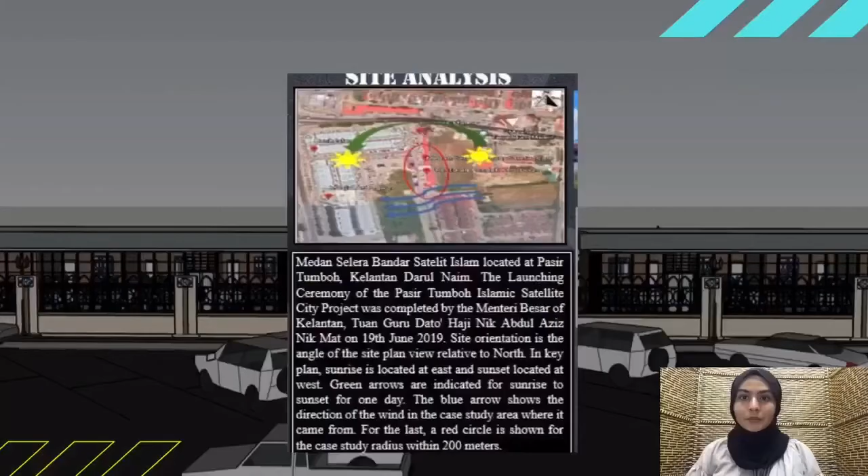Now we move to the site analysis. Medan Selera Bandar Satelit Islam is located at Pasir Tumboh, Kelantan Darul Naim. The launching ceremony of the Pasir Tumboh Islamic Satellite City project was completed by the Menteri Besar of Kelantan, Tuan Guru Haji Nik Aziz, on 19 June 2019.

Site orientation is the angle of the site plan view relative to north. In the key plan, sunrise is located at east and sunset at west. Green arrows indicate the path of sunrise to sunset for one day. The blue arrow shows the direction of the wind in the case study area, where it came from. Lastly, a red circle shows the case study radius within 200 meters.

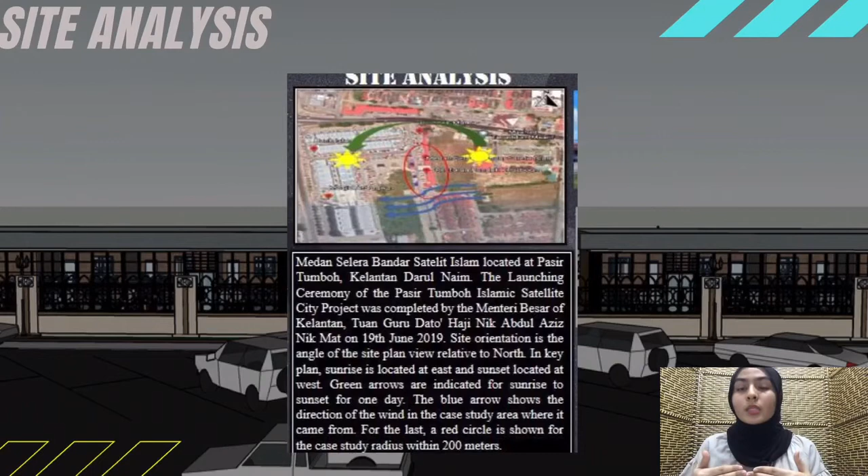We are required to modify the look or facade of the food court to gain more attraction from customers in and out of Kelantan state. The facade is created based on a modern British colonial look, upgrading the function of the building from a food court into a cafe. By that, it will give more aesthetic value and bring such a mood to the customers.

The facade is divided into two wings, and there is a garden between both wings, which slightly functions as a recreation place and the connecting path for customers to enter both wings.

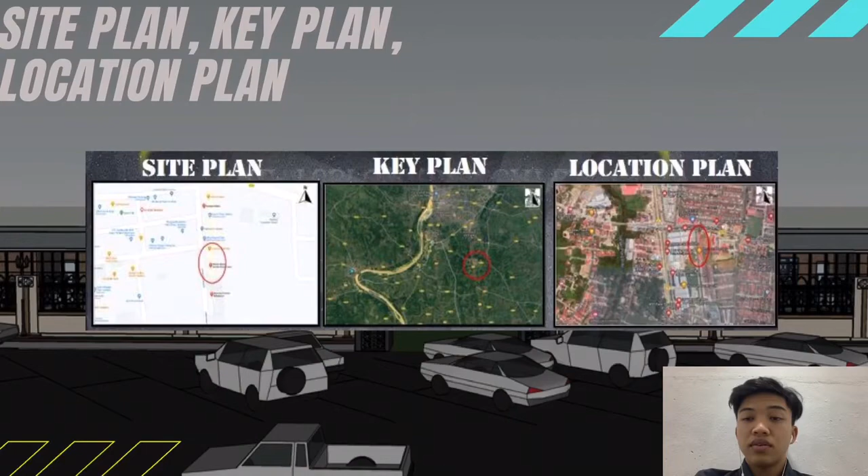We move to the concept idea. Our concept idea provides two places for customers to eat, which are indoor and outdoor. We give options to the customer either to stay and eat inside the restaurant with mechanical ventilation, or to stay outside to leisure and enjoy natural lighting and ventilation.

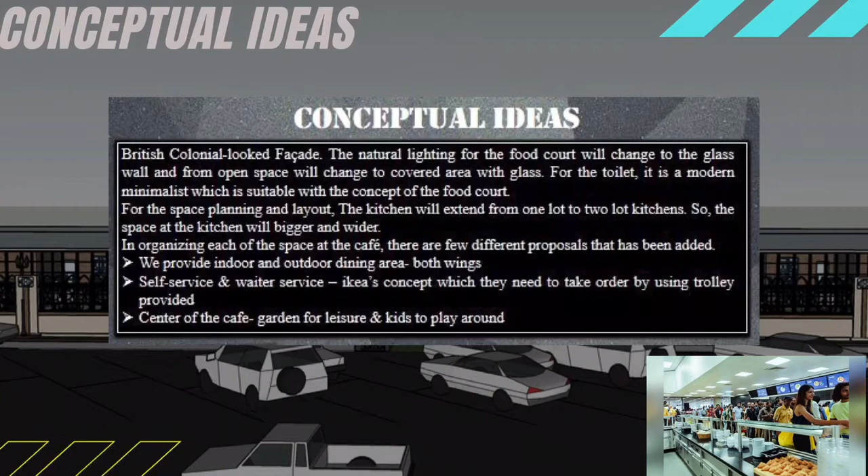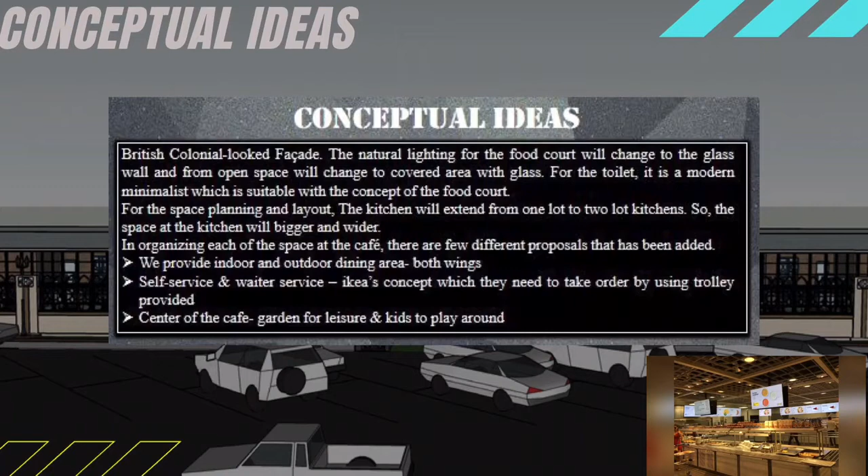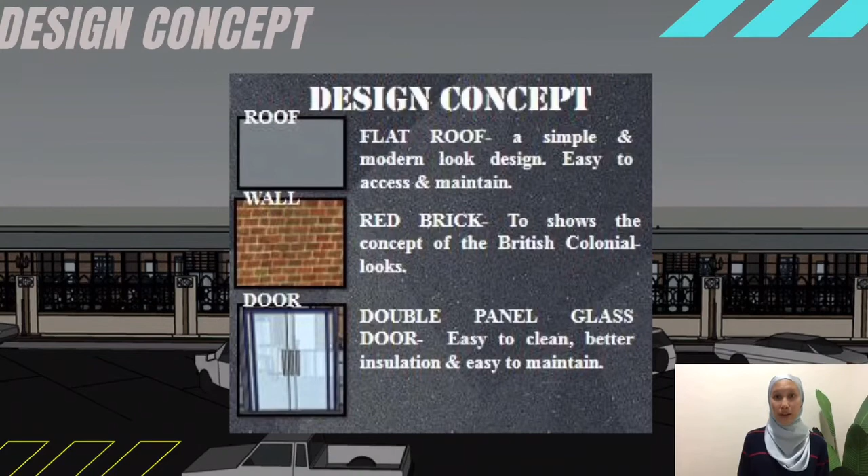Our concept is British colonial and Islamic look, so we use materials such as red brick and glass in front of our case study. We put an atrium aspect with a shaped dome to blend the Islamic look into our case study. Since our case study was known as Bandar Satelit Islam, we needed the Islamic look to remain as the Islamic concept in our facade.

So this is some example that we use as our design concept. In Malaysia, there are several historic buildings that use red bricks, such as Kellie's Castle in Perak and St. Michael Church, located in Sandakan.

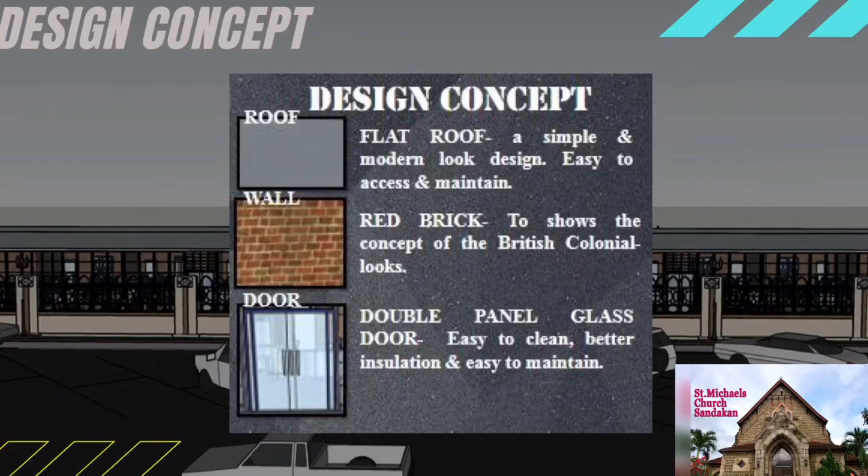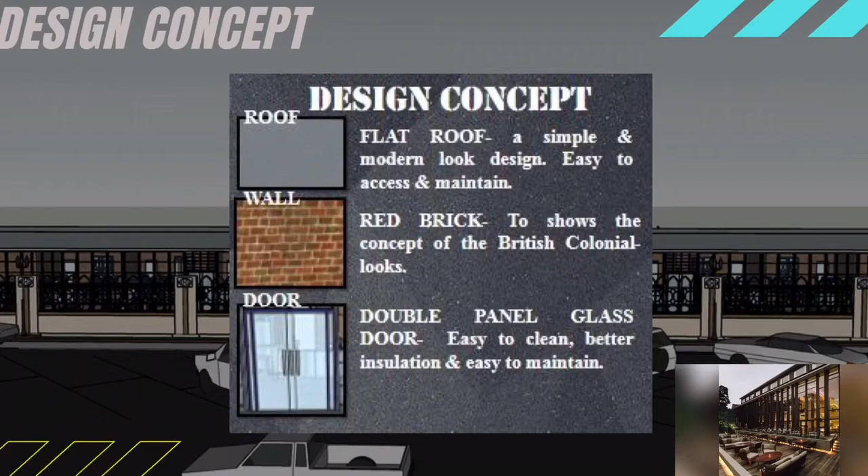So this is an example of the glass wall that we use for the idea in our new facade. We move to architecture design and building elements.

For architecture design, there is a single large hall with a common sitting place for both wings, and the concept design for the facade is British colonial looks, blended with Islamic concept, which has been applied to create a garden using a dome, and there are 3 stalls for each wing respectively.

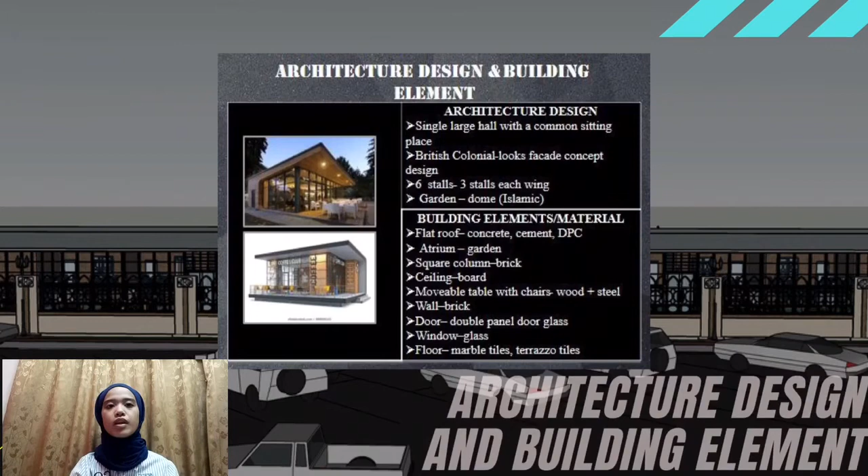For building elements, we are using a flat roof, made up of concrete, cement and DPC. For the garden, we used an atrium glass dome.

Column and wall, we used red brick. For the ceiling, we used board, and there are movable tables with chairs, made up from wood and steel.

Types of door: we use a double panel glass door, while for window we use a fixed glass window. Lastly, for the floor, it is finished with marble tiles and terrazzo tiles.

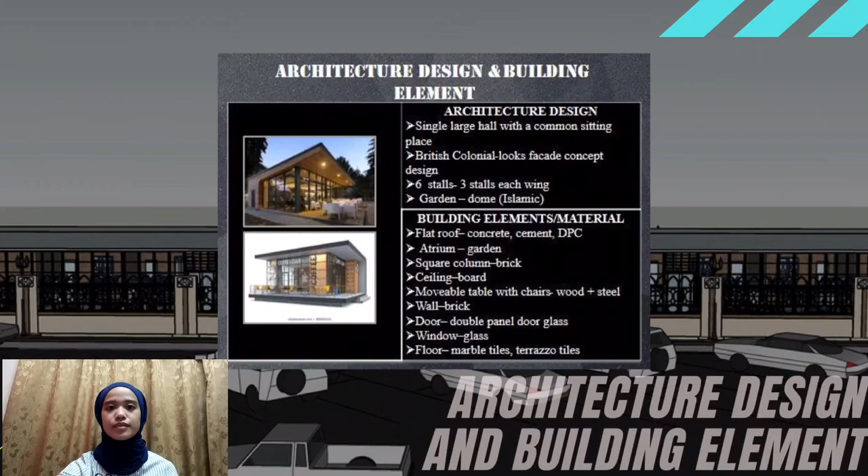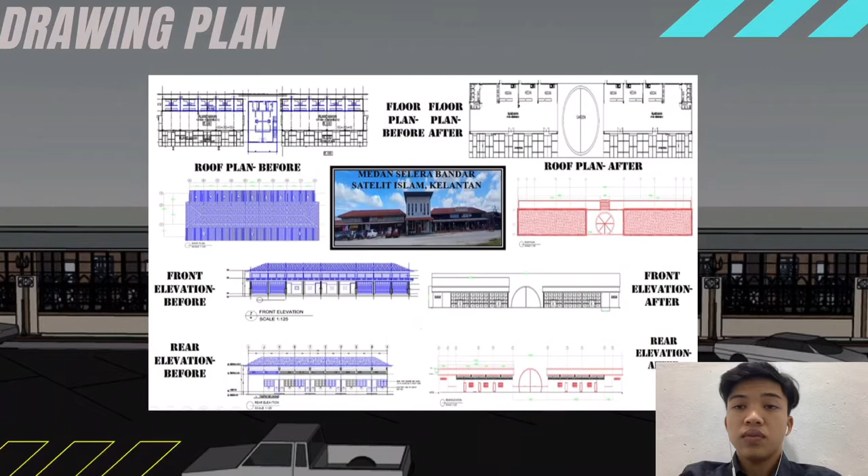Last but not least, we also added more toilets at the left and right of the food court, and we also made a toilet for the OKU. Okay, that's all for the floor plan.

Thank you. Okay, now we move to the drawing for the roof. We have 2 types of roof: flat roof and atrium aspect with dome shape.

For the flat roof, we will provide a DPM, damp-proof membrane, to prevent serious defects occurring, such as mold growth, temperature issues, and dampness.

Besides that, our flat roof will provide a drain and scupper drain to flow the water from the drain to the gutter. The material we use for the flat roof is concrete.

So the next one is the atrium aspect with a dome shape. As I mentioned before about the Islamic concept, we use the dome to blend the Islamic concept into our new facade.

We put the atrium aspect in our garden to give a large open air feel, and besides that, it gives natural ventilation and natural lighting to the plants in the garden, blending natural lighting with the element of green building.

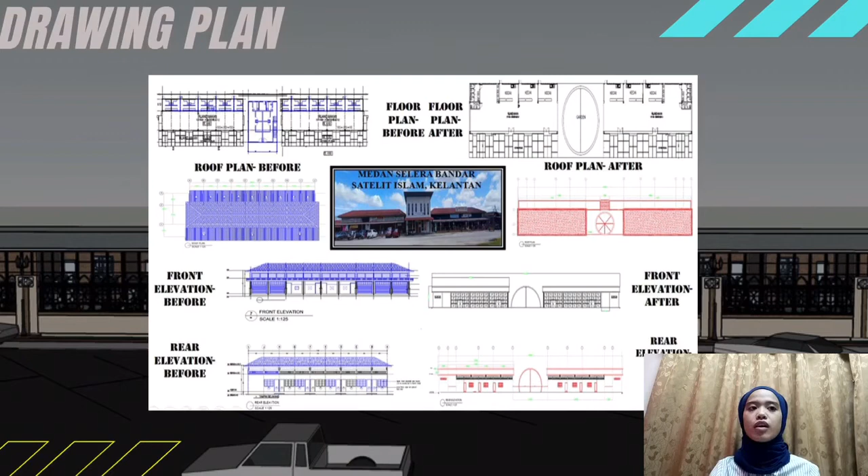There are some changes to the front elevation of the building facade, before and after. Before refurbishment, the existing buildings used a pitch roof, and after refurbishment, it is changed into a flat roof. The function of the office before refurbishment is unknown.

After the refurbishment works, it is changed into a garden with a purpose of recreational place, and the number of stalls is divided into 3 stalls respectively for both wings.

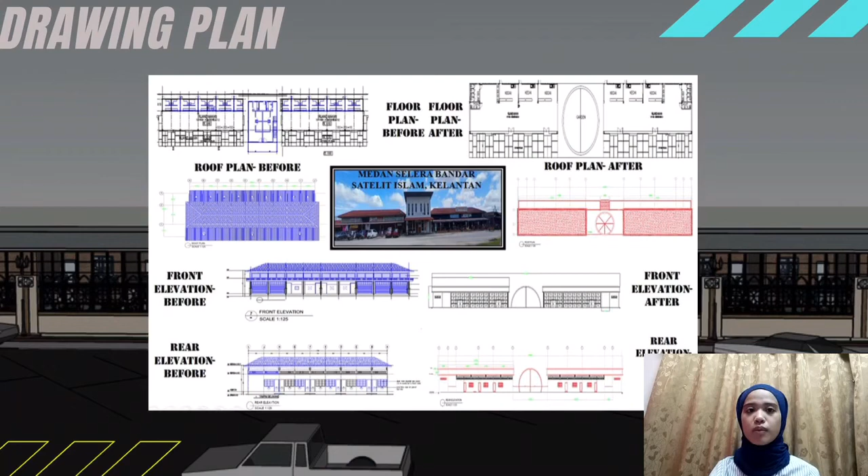As you can see from behind, which is the rear elevation, this building has 3 areas: left, middle and right. These areas have different functions.

For left and right, they function as kitchen and dining area. But for the middle area, it is the garden.

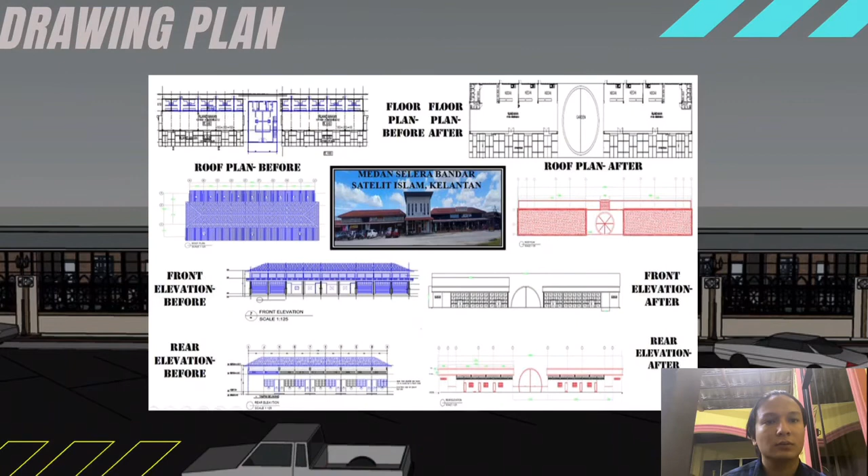We also refurbish and add a new part, which is a toilet for men and women. Next, we also refurbish and add a toilet special for disabled people.

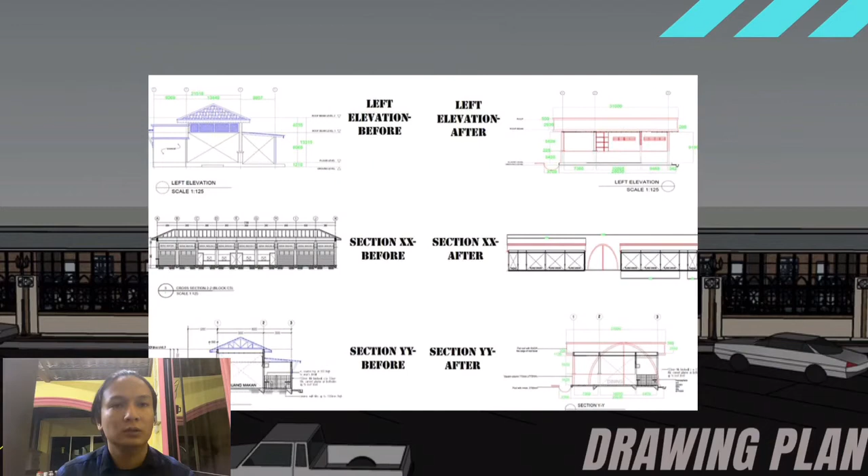Section XX of Al-Tusi Garden Cafe is just the same as the front elevation, with some changes in roof types, number of stalls and location of the stalls, and the function of the office building, which is converted into a garden for recreational purposes.

Section YY, there are a few things that have been changed: the roof type of the existing food court has been changed into a flat roof for the new cafe project, and the entire office building has been converted into a garden for recreational purposes.

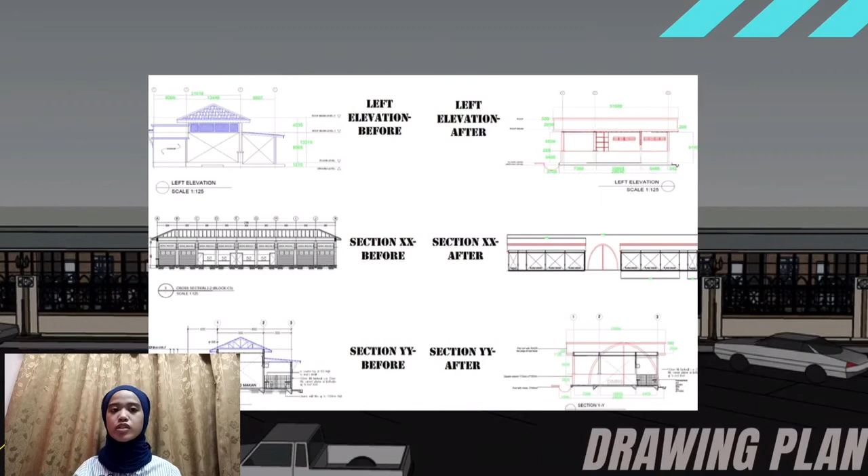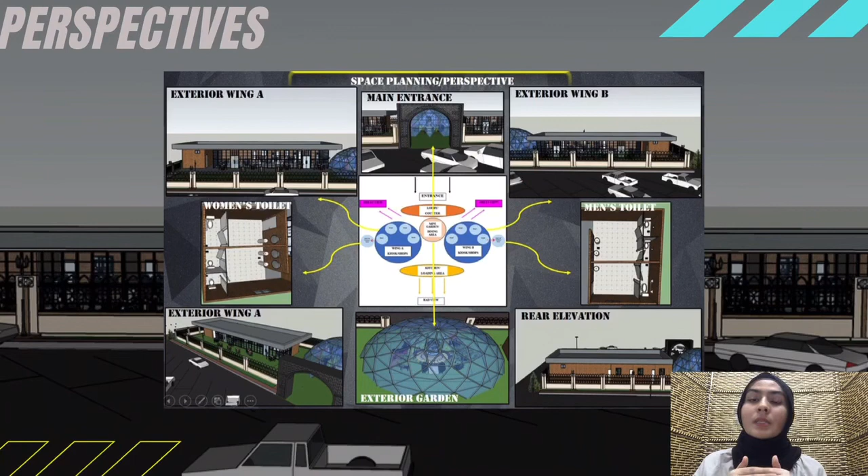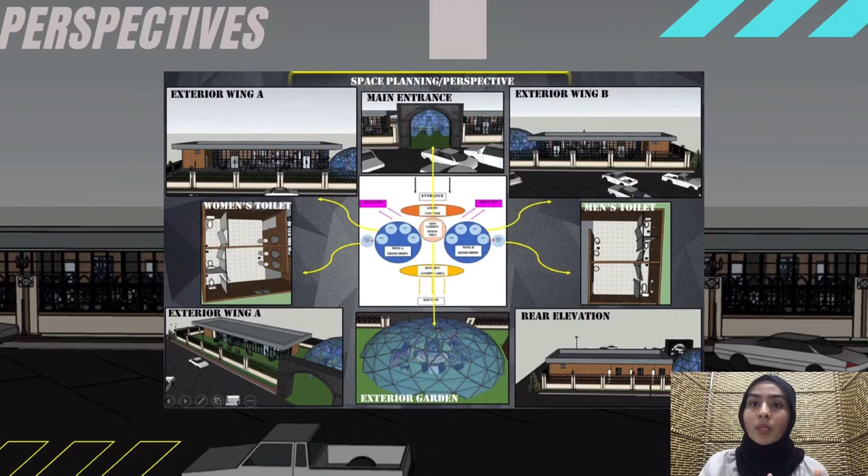At the top right, it shows the exterior of wing B, followed by the men's toilet and rear elevation. The last 3D perspective for this slide is the exterior of the garden, located at the center of the cafe, which connects the path for both wings.

For the last slide, I would like to show you the 3D perspective of the kitchen, followed by indoor dining, which is also the interior of wing A. At the bottom of the 3D perspective, it shows the foresight view of the cafe.

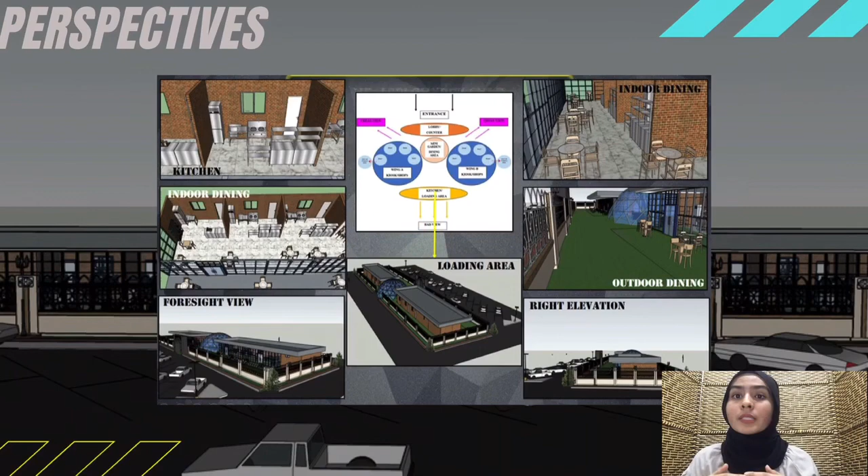Last but not least, at the top right corner is the indoor dining, which is also an interior of wing B, followed by outdoor dining and right elevation. So lastly is the full side view of the rear and loading area of the cafe.